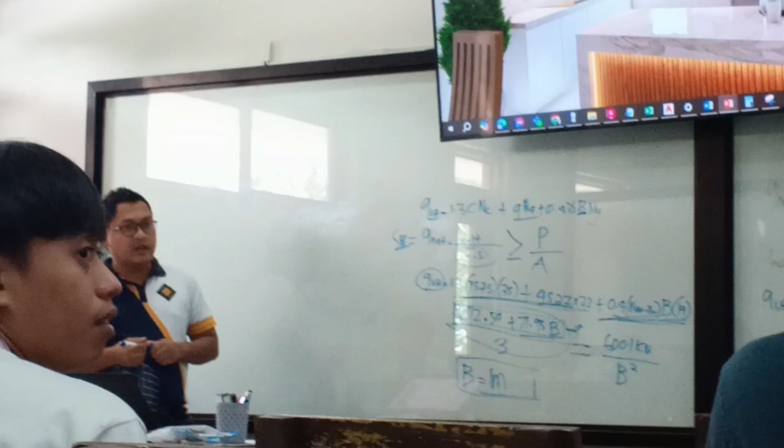Kailangan, design about moment, fixture. Mu mo, total yung maximum moment. This must be less than, this is the demand. This must be less than the design capacity.

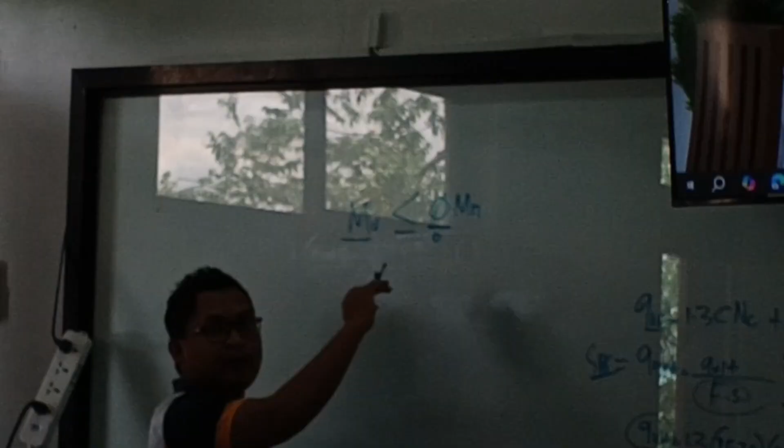Kailangan din kung sa fixture, kailangan din. Depende, di ba? Natay question, natay position, natay ito. How about shear?

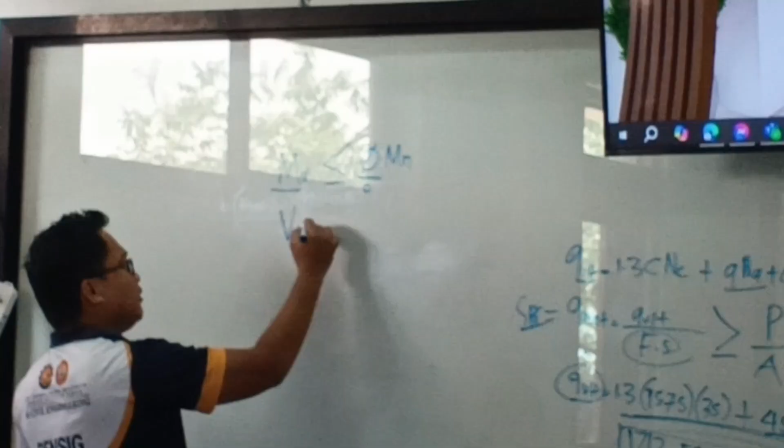Again, shear must be less than the design. Ilan is yan? 0.75 ba? 75, check na. Torsion 75 na. Ito kasi nasira na yung number 1 class.

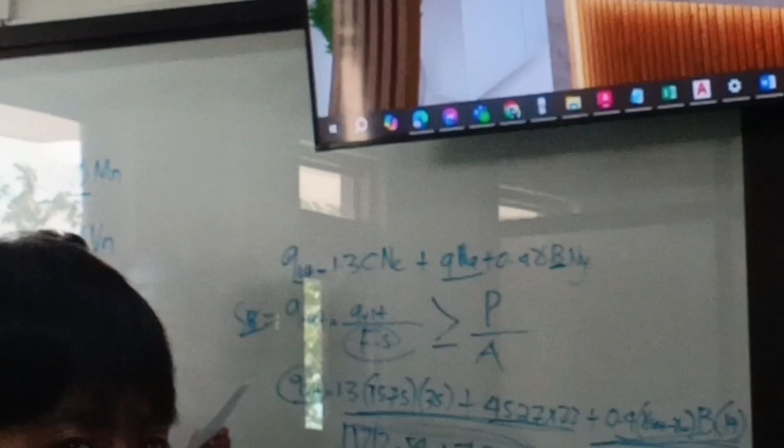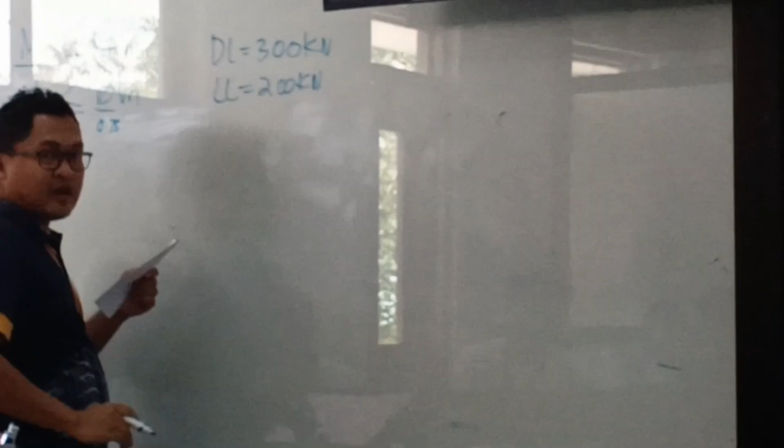Okay, basa ko na, the reactions generated from staan are dead load 300 kilonewton, live load of 200 kilonewton. These are unfactored loads, no? Using factored loads, you multiply the factor.

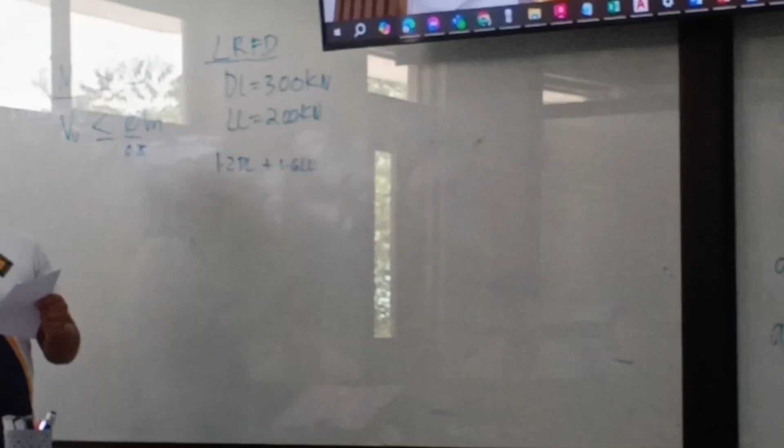So here you see LRFD. Atong loads, you multiply yung mga factors. Saan yung mga factors? Now, we go dead load plus basis like that. So, kanina yung mag-over if wala yung straight load. So, nag-state niya, makani is factored load, iba na yung dinili 1.2 dead load.

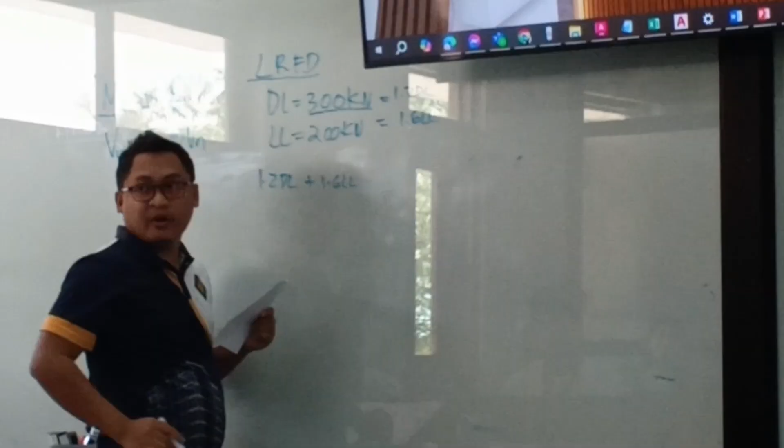Makani is 1.6 live load. So, with that, kung yan sa amin kung ba?

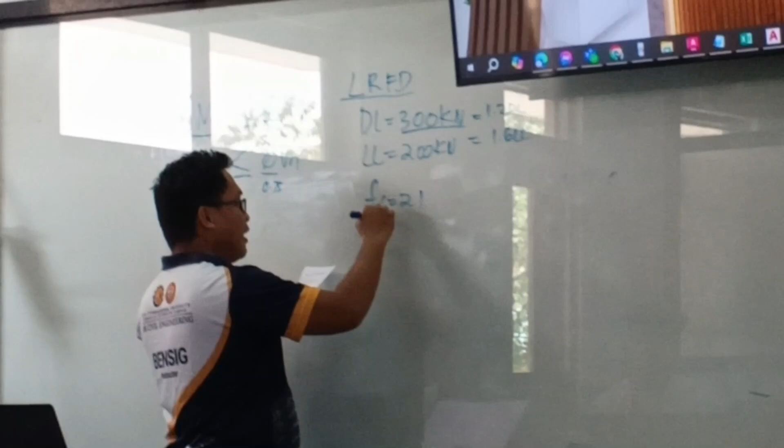FC prime, 21 megapascal. Fy equals to 275. Unit weight of concrete is 24. Unit weight of soil is 18.

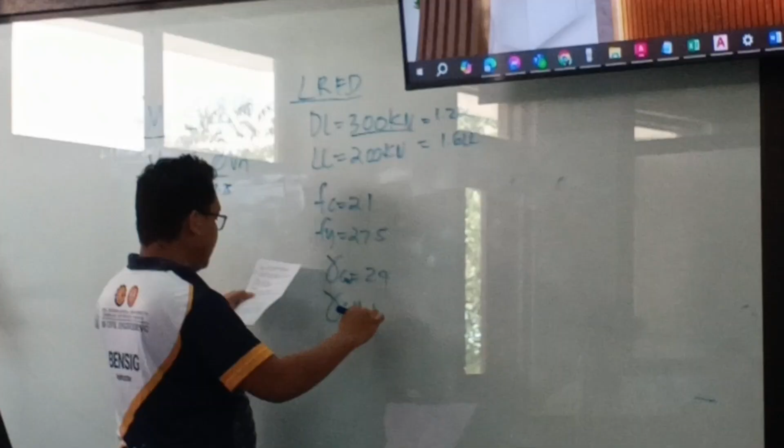So the bottom of the footing is located such that initial footing thickness is 300. Mag-set ka initial thickness mo.

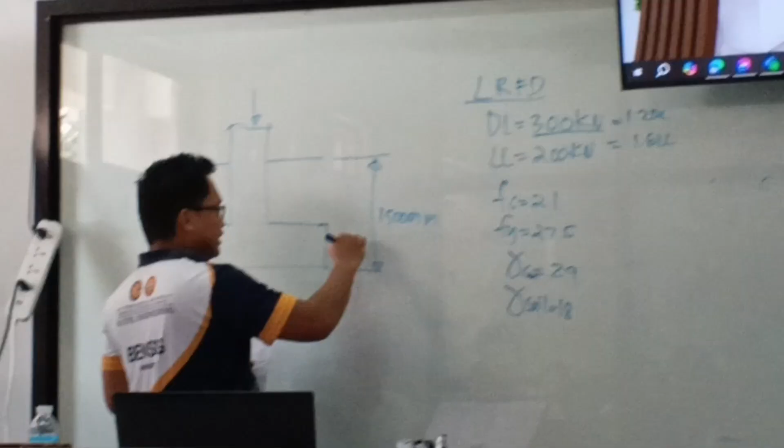So required number 1 is dimension of footing. So kita pag-solve sa dimension of the footing. Wow, sa nato ha? 15, no?

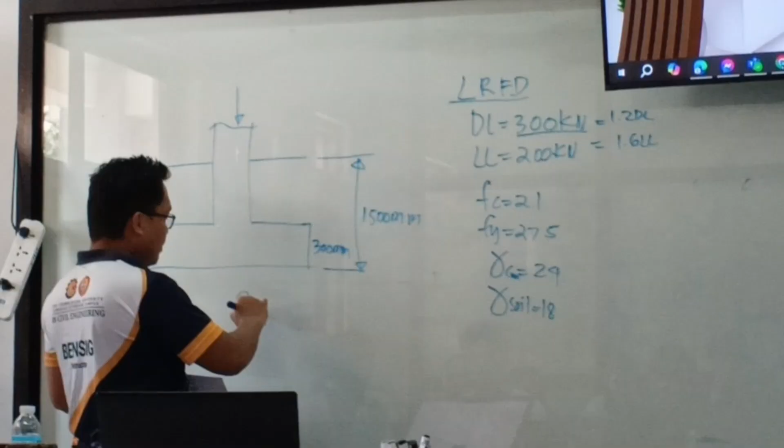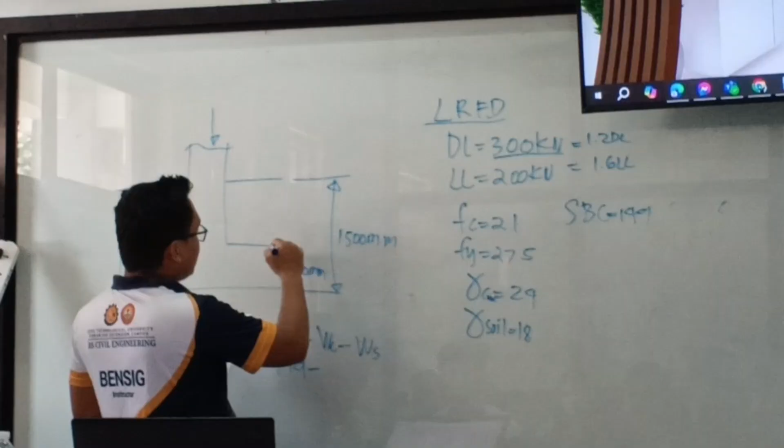So SBC minus weight sa concrete minus weight sa soil. SBC na to, so given SBC na 144. 144 minus weight sa concrete. Kanina? Ilan? 24 times 0.3, initial thickness.

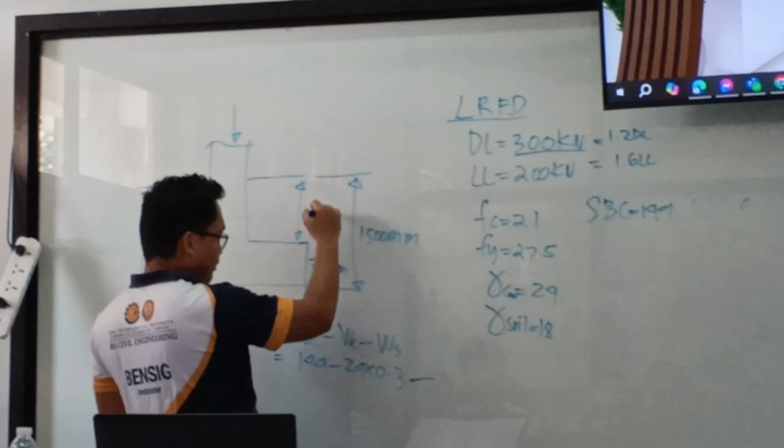Weight sa soil is 18, minus 1.2. So with this, mag-solve daw 15. At i-value na. And with that, compute the dimensions of the footing.

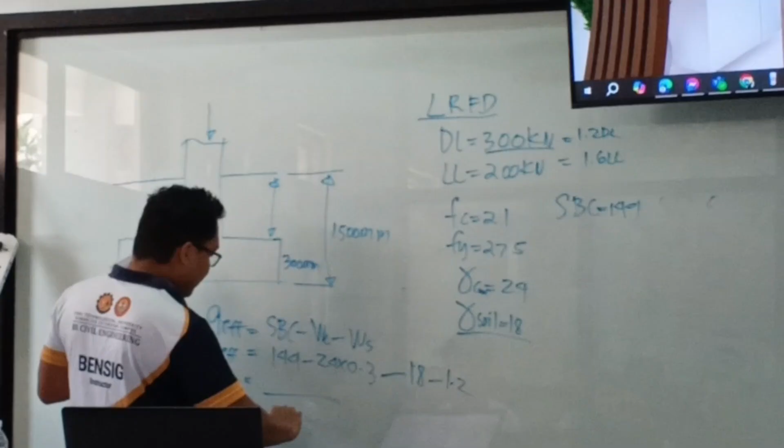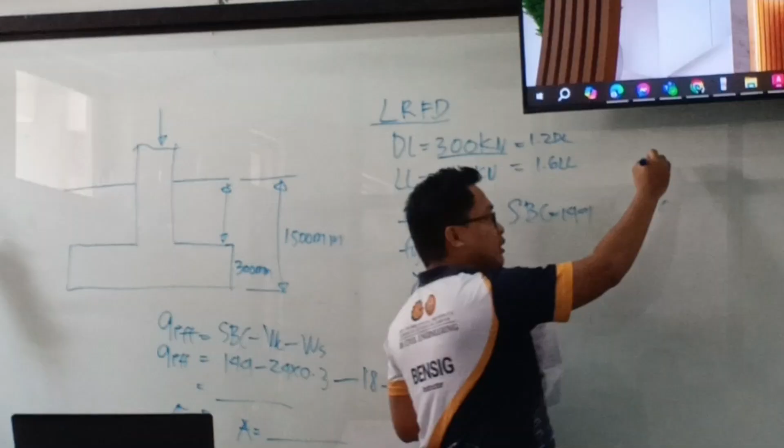So dimensions of footing, stress equals force over area. Area of footing is force na to. Take the total force. Again, kung mag-solve ka sa dimensions of footing, it should be service loads. Natin itawag na service loads.

Kuha pa na pag service loads, naka-mention that these are factored loads. So, ilan yung dead load na to service? It should be 300 minus, divided by 1.2. And live load is 200 divided by 1.6.

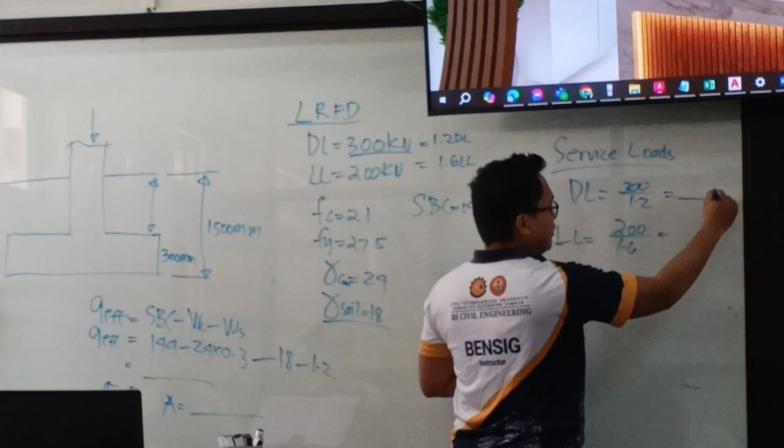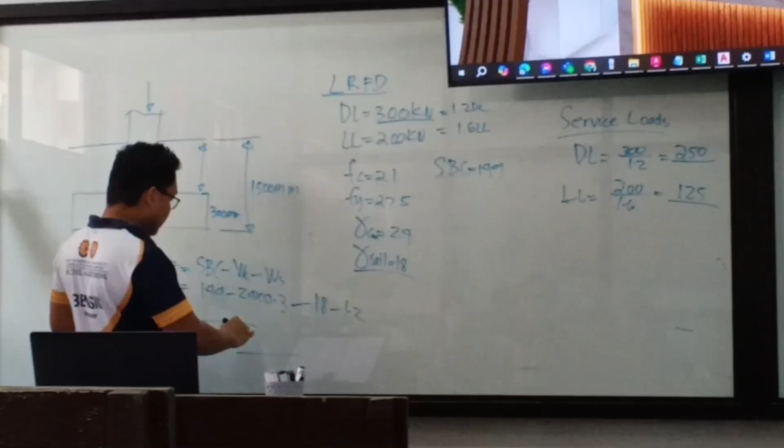Really guys? So it's 250. Ano, 125. Okay, so with that, solve na to ang area sa footing. So, 250 plus 125, this is B squared, is equals to this.

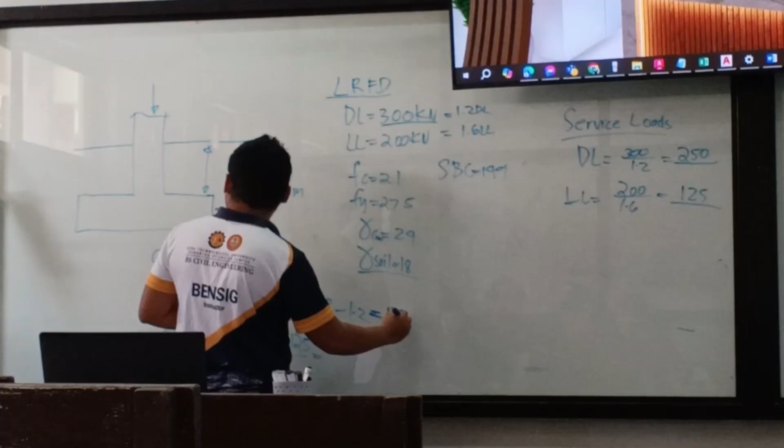Kailan siya? Kailan guys? Kailan na? 115.2. So with this, masolve na to. Dimension. So, kailan dimension? 1.

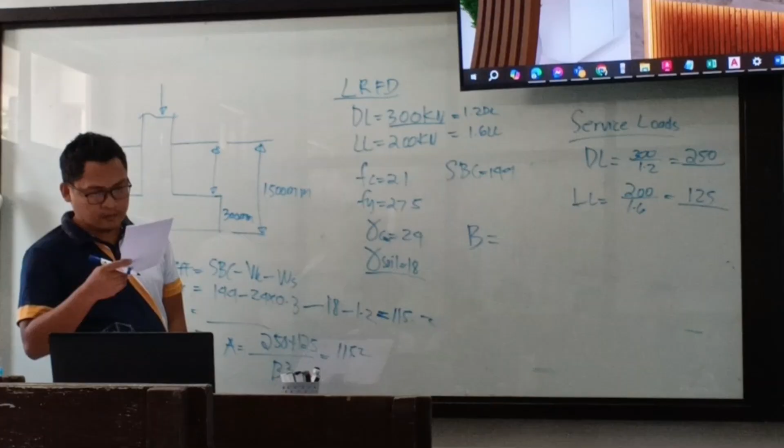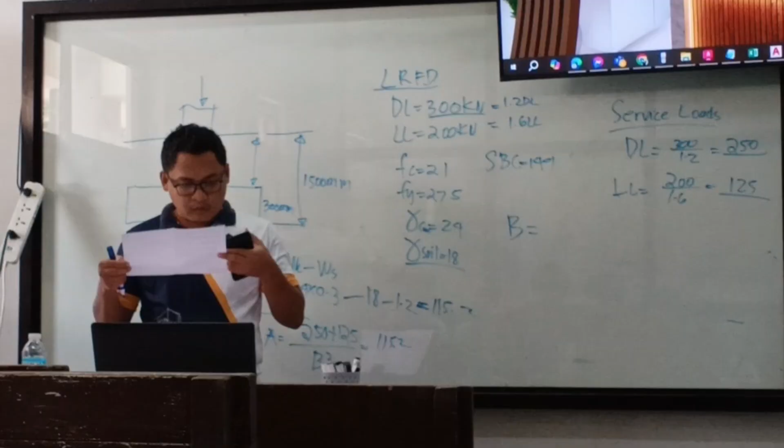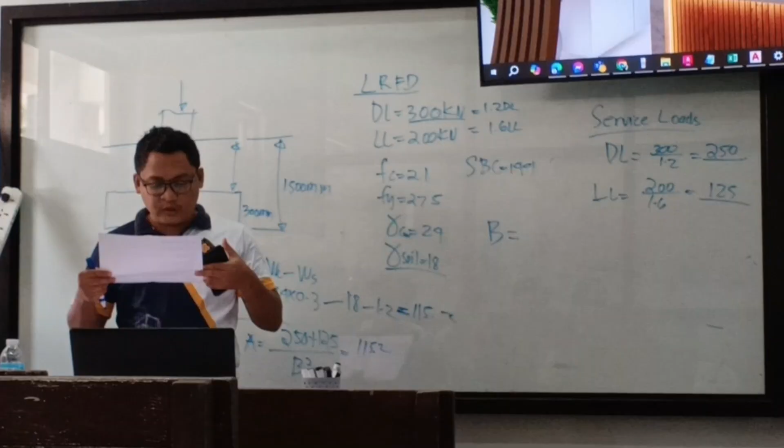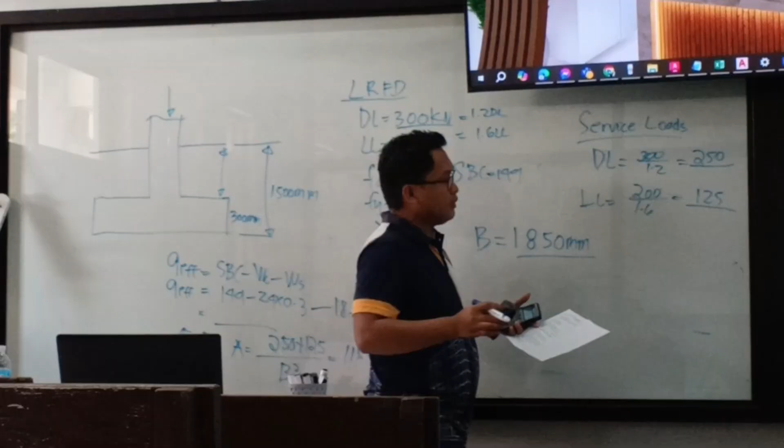So, karon, initial size thickness na to is 300 mm. Hindi na sure if okay ba rin ang thickness o safe ba rin siya sa shear. Again, natin one way shear.

Once the load are applied, ang load, ang footing is maka-experience o compress ang soil, compress ang footing. So, it will be, with this, the footing will tend to bend. So, with that, natin itawag ng one-way shear.

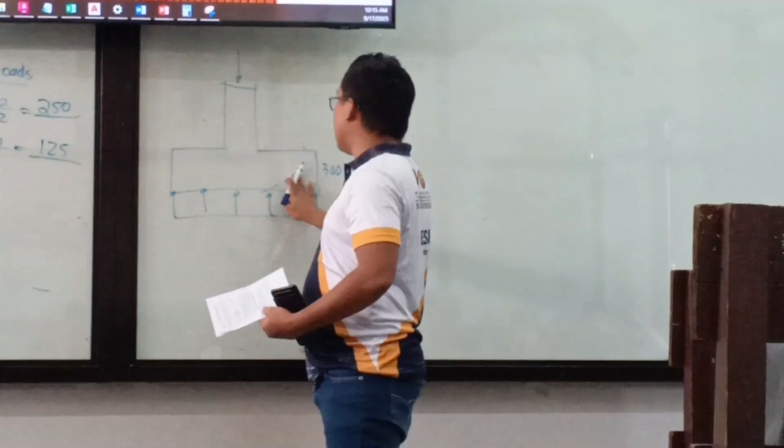Okay, so saan na ito mag-check? So first, wag na ito si PU. Pili PU na ito. That is 300 plus 200, equivalent to 500 kilonewton. Now, solve na ito si QU.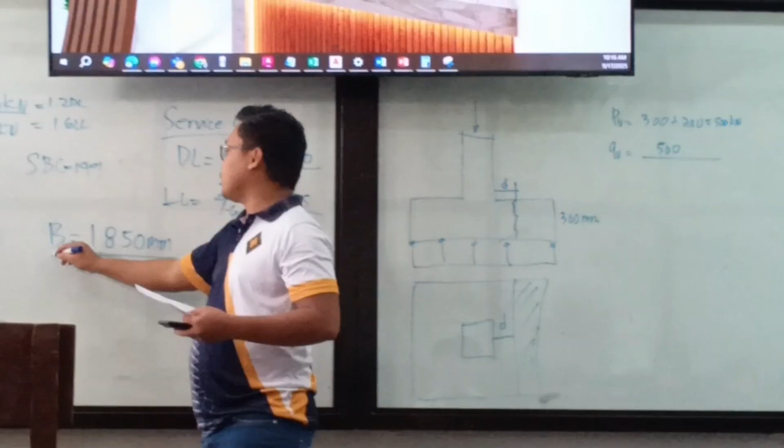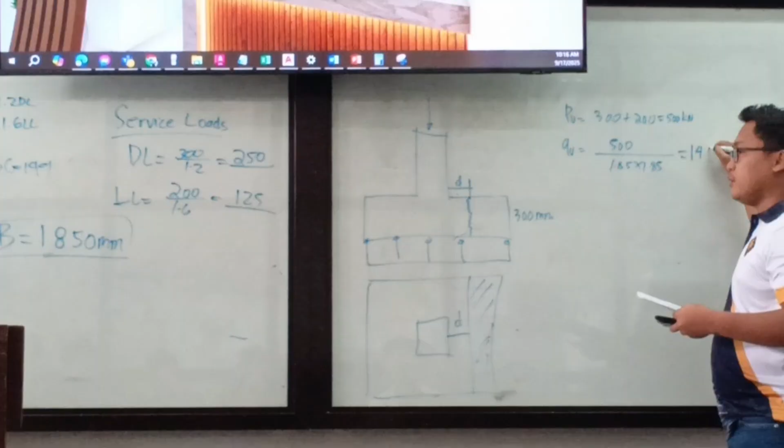QU is 500 divided by the actual dimensions na, kasi may gamit na dimension. That is 1.85 times 1.85. So, pila siya? 146.09.

So ganun mo actual stress diya sa soil, o sa footing. Una mo durot, QU. Okay? So, kanina QU, kung may budot sa footing, makapotol di siya. Shear siya.

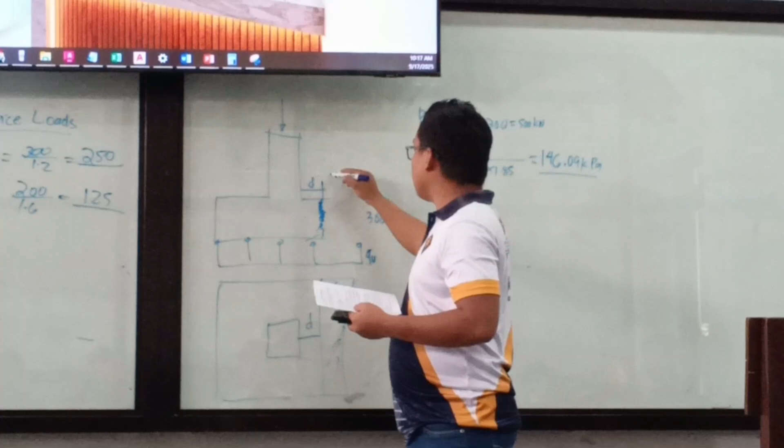Okay? So, once makapotol na siya, fail na ito, right? Because of this force, VU. Muna na shear. So, saan na ang VU?

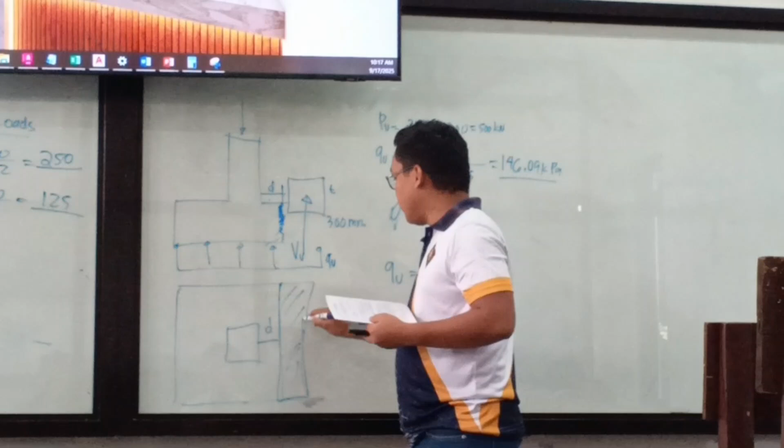So, VU is just, again, stress equals force over area. Stress na to is QU. Force na to is VU. Area is ang vertical na area, area shear. So, masolve na to si VU. So, QU times result. Kanina, sabi nga na dimension.

So natin dimension na. So question na lang, pila si D? Pila D? So, D is natin thickness na. So, 300, assume thickness 300. Concrete cover, 75.

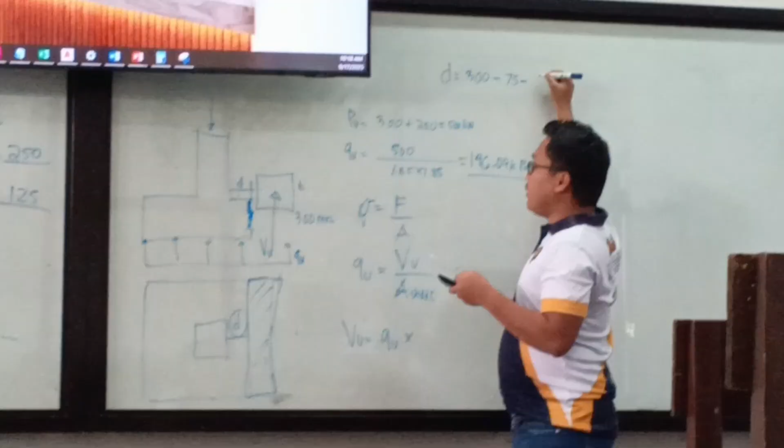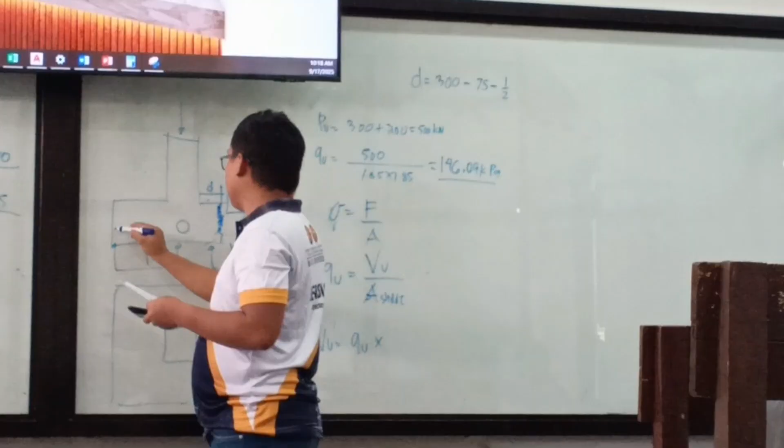Minus 1/2 of 16. So pila ni class plan hindi na to? Pila? 217. Point. Sakili?

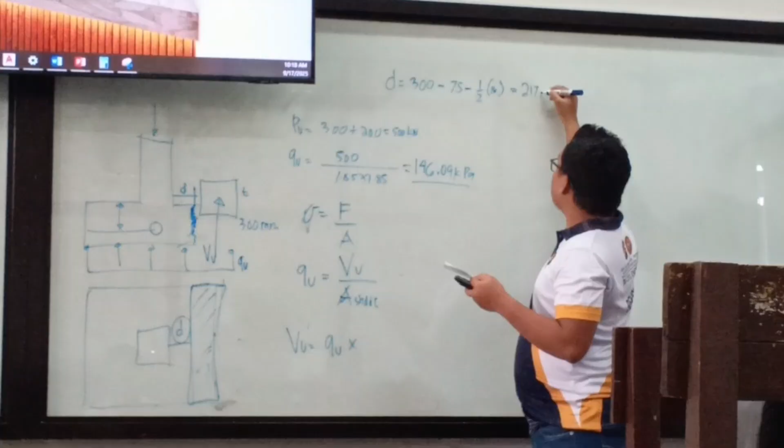So 217. So with that, kuha ko ning kanina length. So this is x. X is x times. Saan siya? B ba? X times B. Ang x na to is equivalent to B minus the dimension of the column.